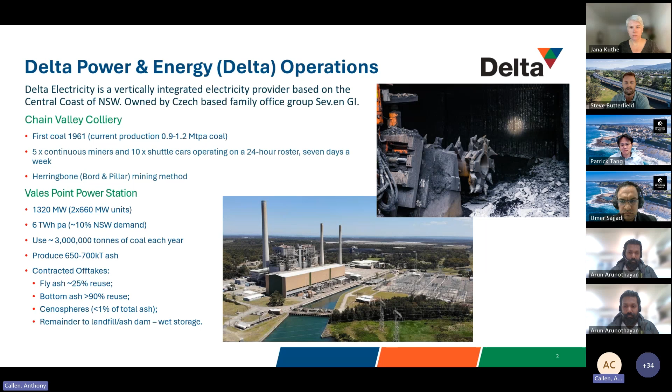This next slide sort of shows where we fit into the grand scheme of things. For those that don't know, when coal burns in a furnace, most of the organic material burns and produces the heat, which generates the steam, which gets turned into electricity. But the mineral matter that doesn't burn inside the furnace is termed coal ash, and as I mentioned before, we recycle about 25% of that, and then the remainder gets landfilled.

There. So you got me there, Aaron? Yeah, clear now, Anthony. Yep.

Gotcha. So the remainder of the material gets landfilled. And so we're constantly looking for new opportunities and new markets to reuse fly ash rather than landfill it as well.

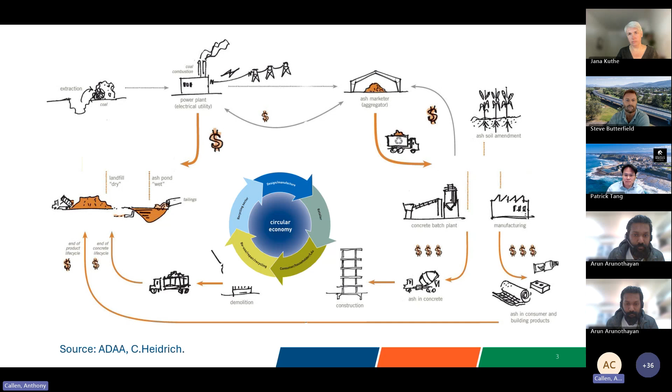So today's project is the SmartCrete project run through the University of Newcastle, and I'll let Patrick and his group talk a lot more about the technical side of things and where we got to with the project. But I'll just throw up a couple of other technologies that we've been supporting around the reuse of fly ash.

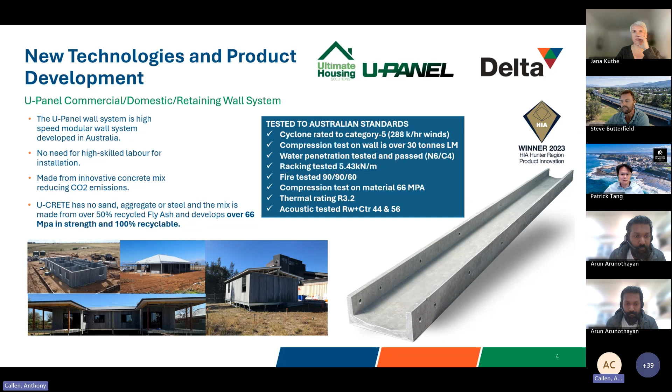So ash, of course, as we mentioned, can get used in all sorts of concrete products, which opens a wide range of materials, including precast materials. And we've been supporting a local group that produce a precast panel that can be used for housing construction. So the U-Panel Group, or Ultimate Housing, based at Somersby here on the Central Coast, have been using fly ash from Vales Point to generate these precast panels, and have been used in a number of housing projects, including some on-site offices we've built with them here at Vales Point, but also you can see there are a couple of other examples throughout the state.

Now, utilising fly ash in cement products is an important area to use a lot of fly ash, but there are sort of standards that require or limit some of the volume of ash that can be included.

We've also been working with another group on what they term a very low carbon concrete, which is actually a zero cement concrete that they've been working with. So this is an alkali activated cement where they're using high volumes of fly ash and slag from steel making, mixed with some other activators to produce a zero cement concrete, essentially.

The images on the right hand side there are some of the field trials that Patrick and Steve from Daracon will talk through in a little bit more detail. But I thought I'd just set the scene there with a couple of slides just to show where we fit into the scene.

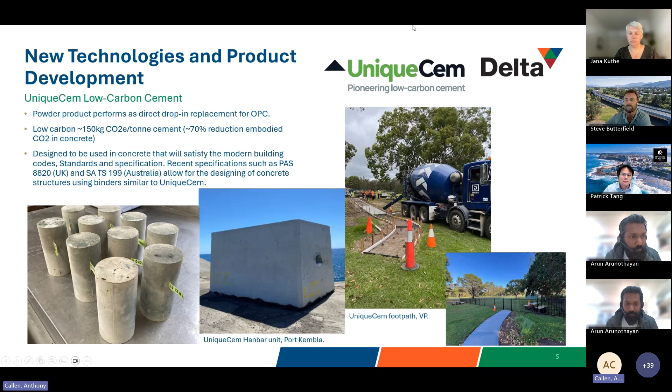And I guess the big driver for us for this research project with SmartCrete was looking at alternative technologies and new markets to reuse ash from coal-fired power stations. So, Arun, I might stop sharing there and hand over.

Yeah. Thank you so much, Anthony. That's a fantastic layout for us to build on. And it's great to see. I mean, I was told the other day that we produce about 12 million tonnes of ash annually, and most of it goes to dams, and trying to do something with it is a great idea.

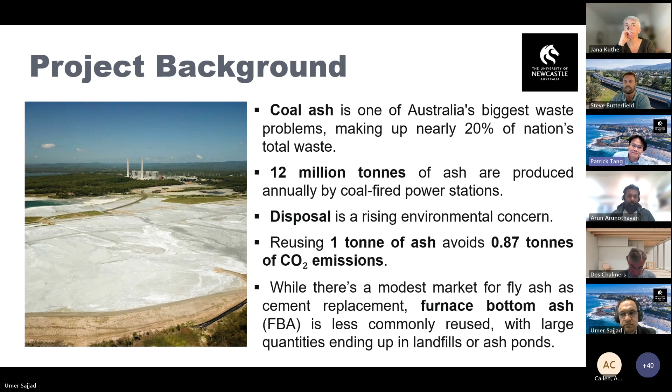So in this project, we focus on exploring innovative ways to use FBA in concrete. We try to reduce environmental impact and also support Australia's transition toward sustainable waste management practices. It's an industry-driven research project, and we try to develop practical, impactful solutions to solve the ash problem.

This project is funded by, and also supported by SmartCrete CRC and industry partners, including Delta Electricity, Daracon, Concrush, Ash Development Association of Australia, and Transport for New South Wales. This project also received support from researchers at RMIT. We are Newcastle University, and we are the lead of this project. That is the background of the project.

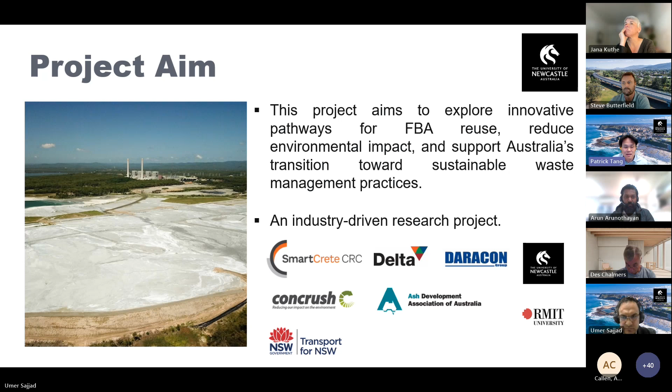Thank you, Professor. So today we will be talking specifically about furnace bottom ash. First of all, what is furnace bottom ash? From coal combustion electricity power generation, we have a lot of ash production, and one of those is furnace bottom ash.

The collection is such that a major portion of the furnace bottom ash sometimes ends up in ash ponds for reclamation, or sometimes a smaller quantity can be reused for different purposes, like embankment fills or fine aggregates. The production in Australia is around 10 to 20%, which is around 1.3 to 2.6 million tons annually.

Just talking about furnace bottom ash, in composition it's chemically similar to fly ash but with larger particles. So when we compare it with cement and other cementitious products, it's slightly coarser than those products. That's why we have to treat it by doing some pre-treatment, then we can use it as SCM or as other fine aggregates.

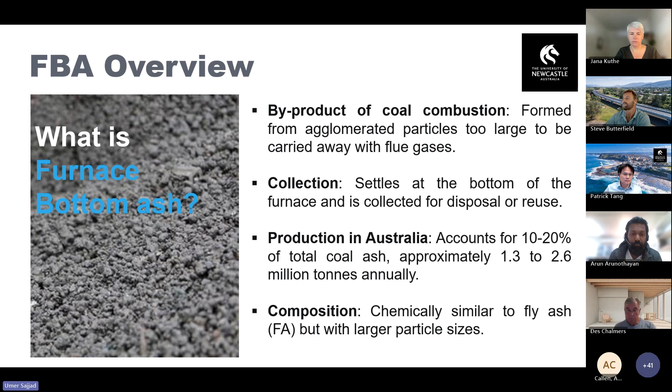So the benefits of reusing furnace bottom ash is, of course, environmental sustainability. When we use furnace bottom ash, we use it as a partial replacement of fine aggregates in concrete, and we are also developing and researching to use it as an SCM in concrete. So we can replace cement as well as replace natural sand.

When we are replacing natural sand, we are using fewer virgin resources, and we will promote circular economy initiatives by reclaiming furnace bottom ash from ash ponds, and then we can use it in concrete for long-term utilization.

Then, decarbonization and climate goals. Of course, when we are replacing cement, we are lowering the carbon dioxide emission from concrete production, and it will reduce the carbon footprint of construction materials and infrastructure projects.

It also has the benefit of aligning with the National Waste Policy Action Plan, which includes resource recovery options and reduction in waste generation. So if we are using furnace bottom ash in concrete and not landfilling it or making more ponds of it, we are reducing waste generation, and it is recycled content as well. These three major points are from the National Waste Policy Action Plan.

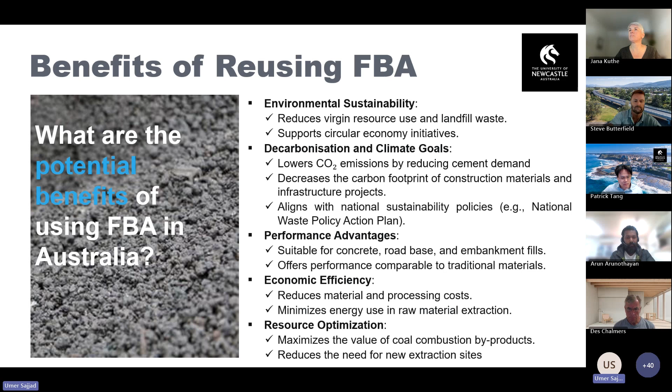So first we have published an article, a review article, published in a top-notch international journal. In this article, we have summarized the major portions about furnace bottom ash, focusing on characterization and the practical applications or different research backgrounds implemented to use furnace bottom ash in concrete or other applications.

This paper also focuses on the United Nations Sustainable Development Goals, specifically 9, 12, and 13. In this, we have summarized everything into a compressive strength chart, which you can see on your screen.

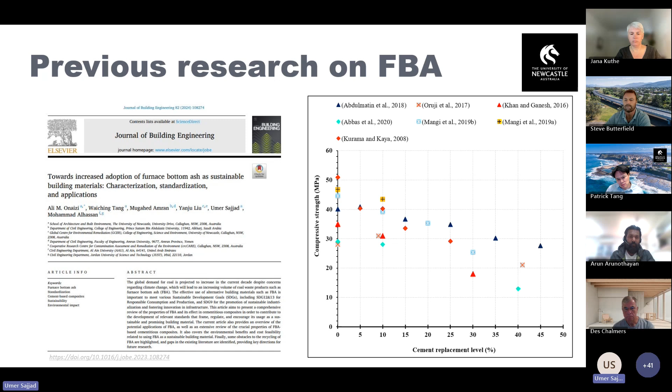Compressive strength is the major parameter used to determine the characteristics of concrete. In this slide, although the replacement level goes up to 45%, the strength is significantly reduced if we use furnace bottom ash as SCM or with fine aggregates, but up to a replacement of 5 to 10%, the strength is not much reduced compared to the control concrete.

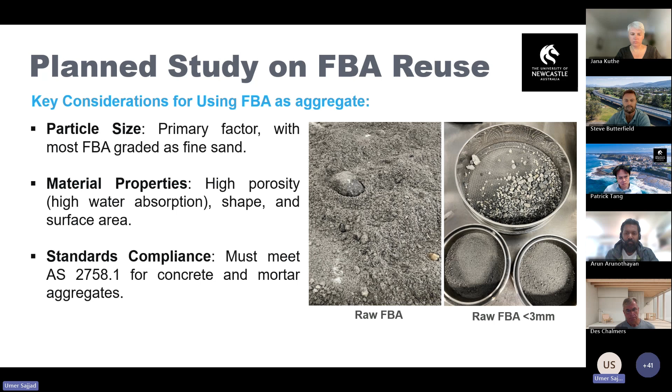So how are we using furnace bottom ash, and what are the major parameters? First is particle size - it is slightly coarser than fly ash and normal supplementary cementitious materials, which is why it's feasible to use as fine aggregate. It has high porosity, high water absorption, and the shape and surface area is slightly higher compared to natural sands. It meets the compliance of AS 2758.1, where we compared the characteristics of furnace bottom ash with aggregates used in concrete and mortar, and it lies within those ranges.

For FBA as an SCM, we have to treat it with different methods before we can use it. As said, it is slightly coarser and has low pozzolanic activity, so different methods have been adopted in research, like heat curing, grinding, activation agents, or blending with other SCMs. What we adopted is blending with other SCMs, because with heat curing you won't get much benefit, and you can't do heat curing at the site specifically for in situ production or usage of concrete - it's very difficult to apply.

The preferred method we opted for is co-grinding or blending with SCMs for lower cost and expertise. In our case, we used ground granulated blast furnace slag, and co-grinded the furnace bottom ash with it, then replaced cement with that blend. In addition, we replaced natural sand with furnace bottom ash, working to comply with Transport for New South Wales specifications, specifically R53 and R83.

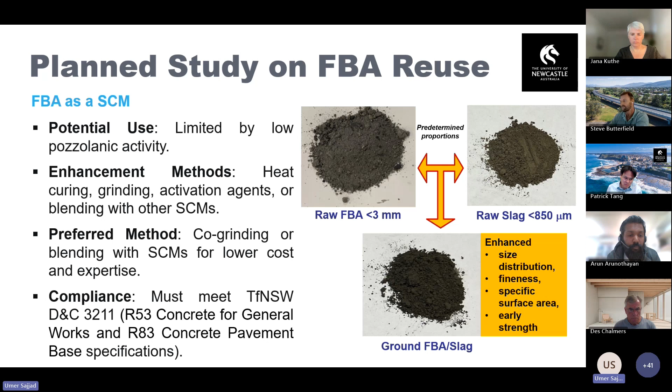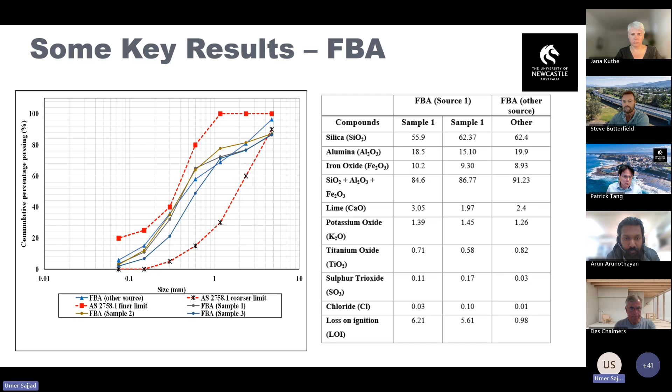This is the particle size distribution results of the furnace bottom ash obtained from a couple of sources, and from one source we've done a couple of analyses. We have chemical composition and also particle size distribution data. We can see that furnace bottom ash lies perfectly within the Australian standard limits of coarser and finer aggregates, so as per standards, we can easily use it as fine aggregate.

These are some key findings from our research done here at University of Newcastle. We have slump values - here I'm showing 5 mixes from the other major mixes we've done. The first is CR0, the control concrete without FBA or any other addition or replacement. CR25 is controlled concrete but with 25% of natural sand replaced with furnace bottom ash. The other 3 mixes are CGF10, CGF20, and CGF30, which are co-grinding of furnace bottom ash with slag, replacing 10%, 20%, or 30% cement with ground FBA. If you have any questions about the mix design, let me know.

So we have slump values first. The slump of the furnace bottom ash concrete mixes is slightly higher - but why? As the water absorption of furnace bottom ash is higher, we used an additional amount of superplasticizer to make it more workable. When we did trial or preliminary testing with a lower or similar amount of superplasticizer as control concrete, we got a harsh mix, very difficult to work with and place. So we found that if we increase the amount of superplasticizer and slightly increase the water in the concrete mix to account for the water absorption of furnace bottom ash, we can have a better mix that is workable and easily placed. That's why the initial slump of these FBA concrete mixes is slightly higher compared to control concrete.

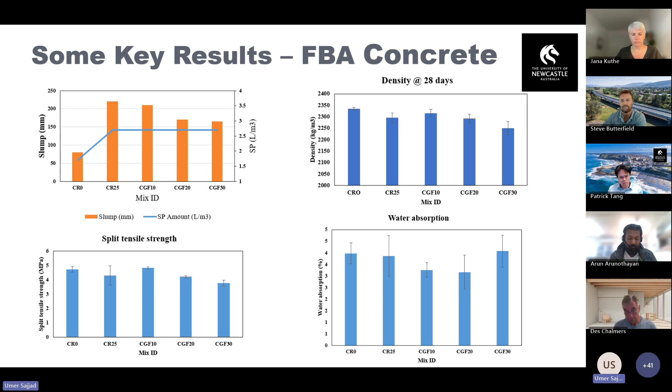Here we have summarized the compressive strength and other tests we conducted. For workability, we also did the slump retention test and air content test. For strength, we did flexural and modulus of elasticity tests. We also focused on durability tests, especially shrinkage, abrasion, and carbonation resistance, and chemical resistance against acid and alkaline solutions. We also did microstructure analysis and life cycle assessment, but due to time constraints, we are showing just the key or major findings.

Here I'm showing the results of compressive strength up to 90 days. We conducted the test, and you can see that the 10% replacement mixture produces promising results compared to the control concrete.

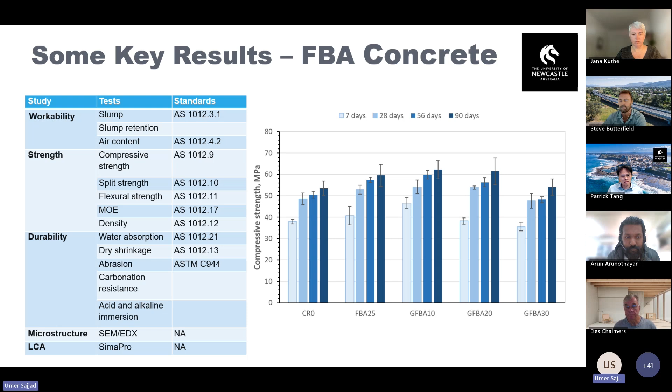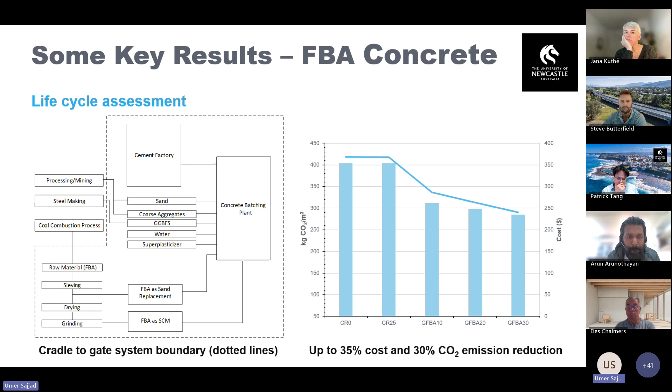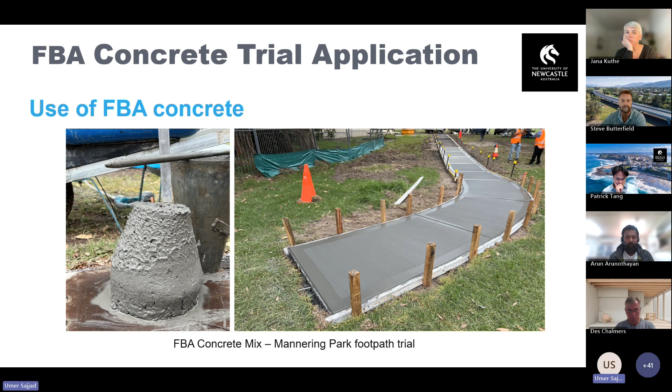These are some challenges and solutions for utilizing furnace bottom ash on a mass scale. We have some technical challenges, the major one being standardization of the furnace bottom ash. If obtaining furnace bottom ash from different sources, there might be slight changes in properties and chemical composition, and sometimes slight changes in physical properties as well, like in some cases coarser particles and in others slightly finer particles. Then there are regulatory and standard challenges, like in terms of handling and storing the furnace bottom ash.

As said, if utilizing furnace bottom ash as SCM, we have to grind it well beforehand to utilize it in concrete, so we have to consider the handling or storage of those ground furnace bottom ash. Then there are some economic challenges specifically related to the pre-treatment of furnace bottom ash to be utilized both as SCM and as fine aggregates. And then there are logistic challenges, because we have a few number of coal power stations around the state or country, so transporting furnace bottom ash to desired locations has some limitations, and sometimes we have supply chain issues.

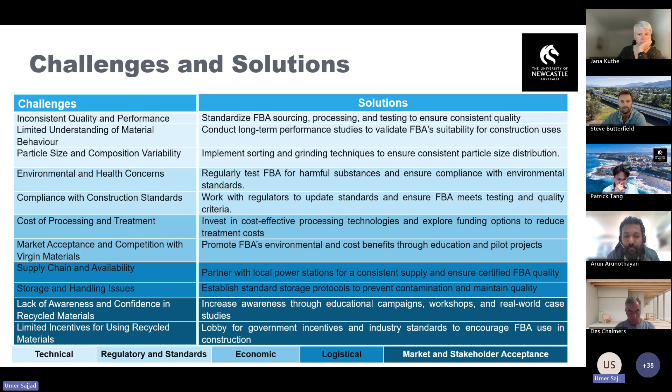For an overall view of the project with the SmartCrete and other industrial partners, we are aiming to continue until the end of the project. Currently, we are developing guidelines so that the public can use, utilize, or get an overview of the use of furnace bottom ash in concrete and the construction industry. Thank you, that's all from my side.

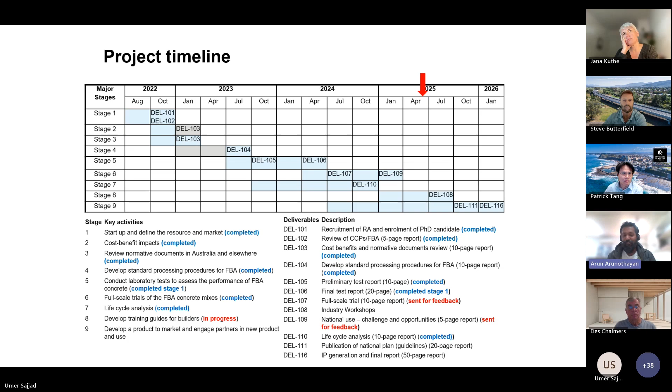Thank you, Patrick and Umer, a great presentation. I think one common misconception in our industry is that as soon as a material is sustainable, it's going to be super costly and not cheap. But this initial research shows it's not only sustainable, it's also 30 to 35% cheaper, which is a great thing to look at.

Another challenge is to scale up and produce on a large scale, and that's where we go with our fourth speaker. But before I introduce him, if anyone has a burning question, feel free to pop it in the chat, and we will take questions after the presentation.

So the last speaker, Steve Butterfield from Daracon. Steve has over 30 years of experience in the construction industry, working both with large and small contractors. He has held various concrete, quarry, and project roles in concrete production, major projects, and technical management. He has had a long involvement with Daracon Group and others, including RFK Engineering Services and BHP. He spent 10 years involved in the BHP Jansen Canada twin shafts project in weather conditions ranging from -40 to 40 degrees.

And the Woodsmith project for twin shaft construction in Whitby, UK, both specializing in super workable concrete, this is SWC concrete. Current projects he is also involved in include BHP Prominent Hill, South Australia, a 1.3 kilometer ventilation shaft project, and K92 gold mine construction project in Papua New Guinea. So he's been around the world, and it's great to have you here, Steve. So, over to you.

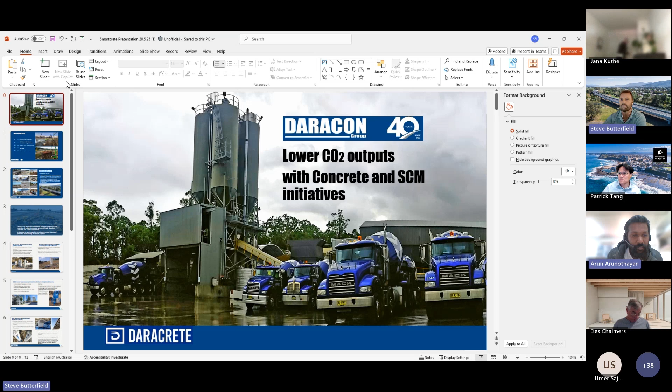Thanks, Arun. You hear that? Yeah, clear. I'm sharing my screen here. Is that sharing? It's the other slide, Steve. Maybe go to slideshow and start from the beginning. The slideshow is a few tabs on the right. Okay, how's that? Yeah, that might work.

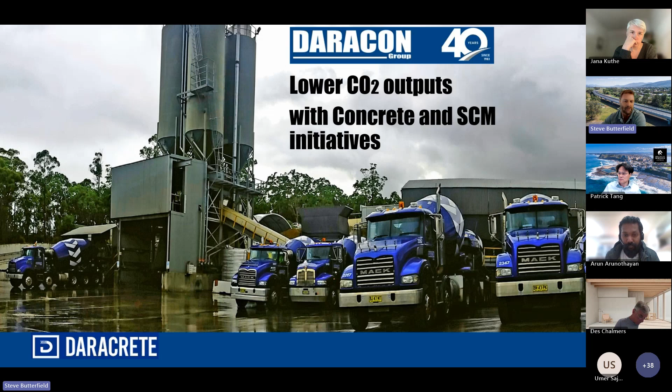Okay, thanks for that introduction, Arun. I'm just coming at this from a point of view from Daracon. Just before we start, I'd like to run through a little bit about the Daracon Group and also talk about some of the other work they're currently doing with their fly ash business.

The Daracon Group was established in 1983 and is one of the largest family-owned construction businesses in New South Wales, with over 850 employees. The Daracon Group is a collective of businesses, as you can see on the left, pretty substantial, committed to delivering superior civil construction services across both public and private sectors with over 4 decades of experience. So they have civil engineering, concrete, quarries, plant hire, infrastructure, all the way down to polywelding and landscaping.

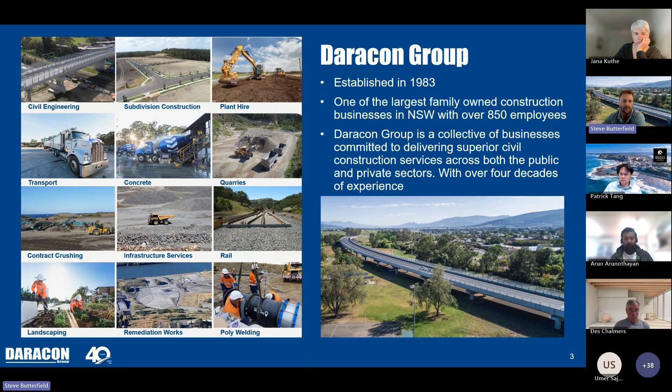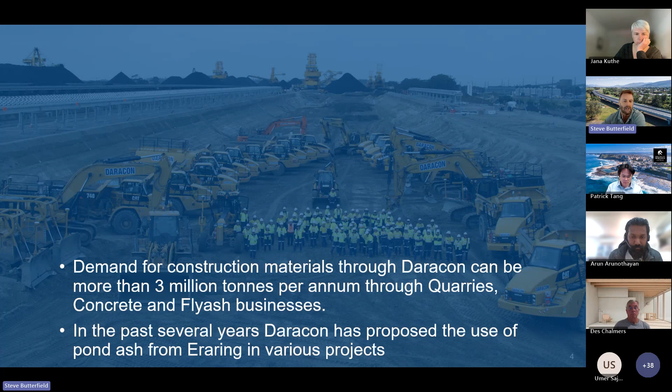Demand for construction materials through Daracon can be more than 3 million tonnes per annum through quarries, concrete, and fly ash businesses. In the past several years, Daracon has proposed the use of pond ash from Eraring in various projects, and they have spent a lot of time on research and development with that.

Part of their business is obviously bulk fly ash with Daracon. They do underground grouting and mine backfill. For the past 5 years alone, they've averaged the reuse of approximately 200,000 tonnes per annum of ash.

Residential and commercial developments in Newcastle forecast a long future of this type of work. Two recent projects have seen a projected use of approximately 250,000 tonnes of material in the coming year alone.

They're also working on heavily bound material, modified road base materials, investigating potential use of pond ash and small volumes of cement for setting currently. Initial trials were undertaken late last year with various viable sources of materials, including different sources of ash and locally available fluids to gain optimal mixes across different strength characteristics. This includes select, modified, lightly bound, and heavily bound material.

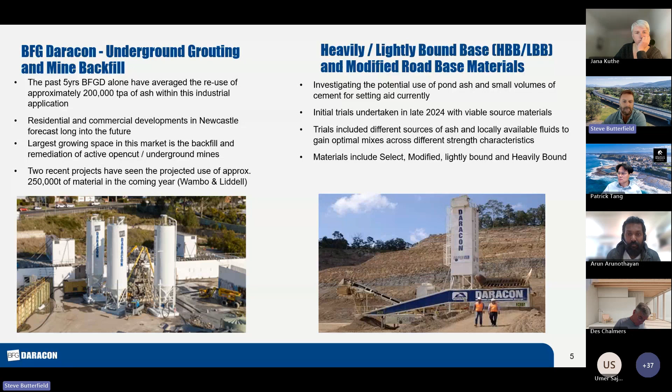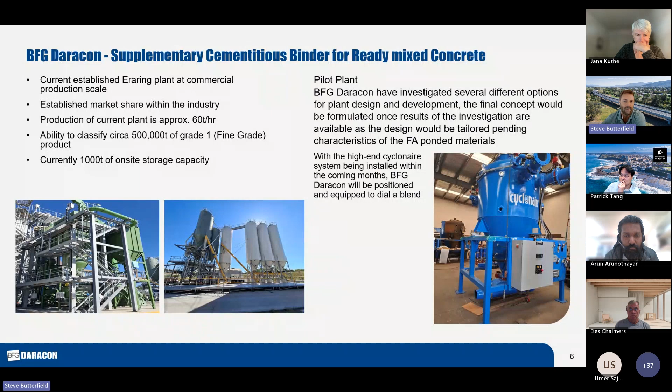BFG Group also had initial trials for bulk grout undertaken in late 2024 with various source materials. They've had successful test results in a variation of strength parameters up to 60 MPa, with success up to 100% cement replacement mixes being designed. The target markets would be within the residential, commercial, and civil sectors.

The Daracon business, the concrete branch of Daracon, currently has a range of 50% plus high-range fly ash concrete mixes, which we've used successfully previously, as well as supplying the bulk fly ash grout CLSM, 90% fly ash and high-strength grout for mine fill and mine subsidence.

We also specialise in a lot of super workable and high workable concrete. We've got developments of near 70% SCM blended concrete mixing, and we're looking to utilise the waste concrete aggregates with the Daracon Buttai recycling facility, which is shortly to come online. So there'll be a lot of work involved in that.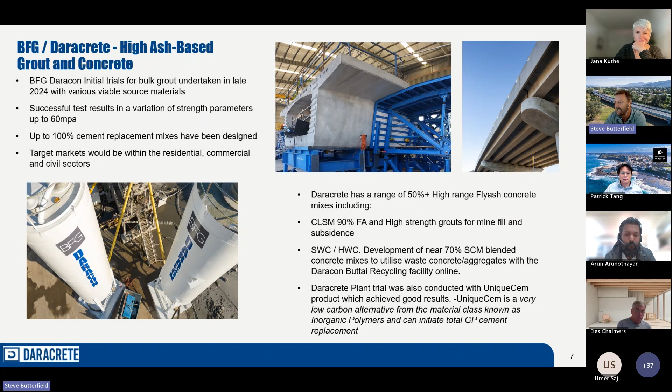The Daracon plant has also conducted trials with UniqueCem, as Anthony discussed, and it's achieved pretty good results. It's a low carbon alternative from the material class known as inorganic polymers, and it can initiate total GP cement replacement also.

Daracon have also, apart from some Smart Creek trials, done work just within the group, looking at what we can do and what mixes we can come up with. These ones were done approximately 22 months ago, and the first four trials were basically just a control 25 MPa.

This was done in conjunction with the construction arm of Daracon. So we had the concrete, set out an area with Daracon provided for us, and set up three test slabs, which you'll see shortly. The first mix is basically just a regular tri-blend, which most guys here in the technical would be familiar with - a tri-blend of fly ash, cement and slag.

The second one had a recycled coarse aggregate added to that same tri-blend. The third one incorporated the same tri-blend of slag, cement and fly ash with recycled concrete, but also had 100% fine sand replacement with furnace bottom ash as a fine aggregate.

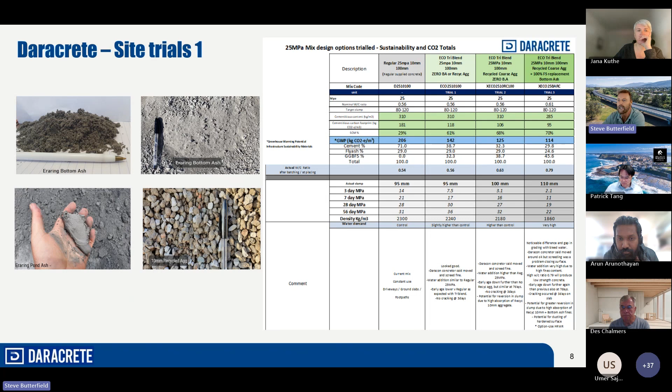You can see the area there - we've got the eco mix, the second one with the recycled aggregate, and the third one is the trifecta of the tri-blend with furnace bottom ash as sand replacement plus recycled aggregate. You can see on the right hand side trial 3 had some substantial cracking early on, which was predicted - that was a really hot day, and we provided no curing for that at all.

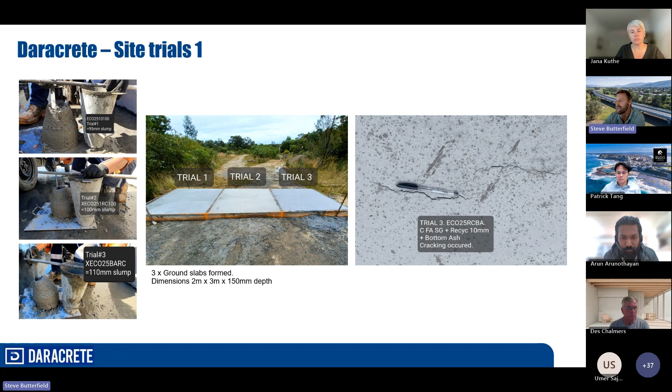We're trying to simulate what the residential market is, which I think most guys listening will know is pretty rubbish when it comes to curing. So we just wanted to try and match that and see what happened. Obviously, with that amount of slag and that amount of fines in there, water demand was really high.

The second lot of site trials was done in conjunction with Lake Macquarie City Council - this is a pathway at Macquarie Field. We didn't provide a control mix there; the control mix you can see on that chart is just for reference.

So we only provided a tri-blend eco blend on this, which was basically a 50-50 cement slag blend, using a recycled aggregate and some of the furnace bottom ash fine aggregate as well. That went particularly well - the path is still looking really good to this day.

Obviously, with slag mixes, when you add the recycled aggregate, it has a very high water demand. You can see the results on the right compared with the control - only 3 MPa at 3 days compared to 13 with regular concrete. And as we know, the growth is obviously a lot better in slag concrete than regular concrete, so at 28 days it more than passed.

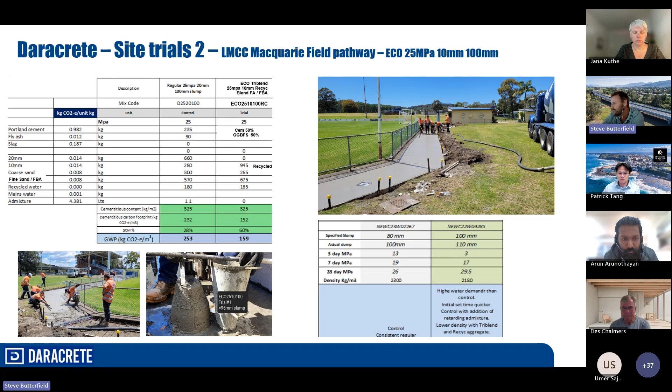Site trials 3 are the ones that have been discussed here, usually the Vales Point material. Again here we had the control mix, which is basically a standard 25 MPa 100 slump, in one part of the footpath.

The other part of the footpath had the tri-blend of GP, slag, and ground furnace bottom ash as a cement replacement, and we also had the furnace bottom ash as a sand replacement in that mix. As per the presentation, the product worked particularly well, considering that was a 45-minute delivery time as well. So load 2 obviously lost a bit of slump, so has a larger water demand - there's also a bit of a colour difference.

But as of the next day, when I went down there was no initial cracking, which is a really good sign.

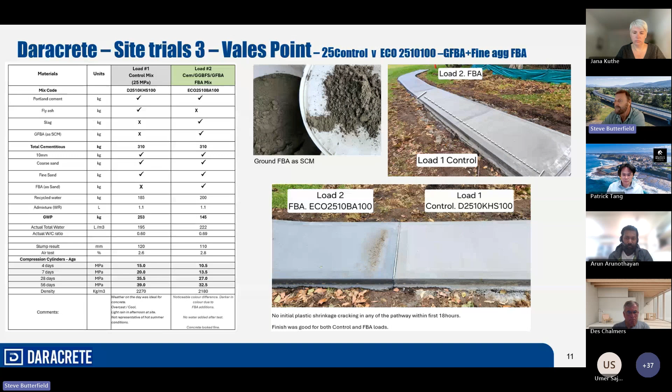However, the production using these materials needs a high level of quality control and good site practices. The delivery and storage of the ground furnace bottom ash and the furnace bottom ash as a fine aggregate, the batch plants requires further progression for bulk deliveries in future if the market uptake is large. Obviously, the storage of the furnace bottom ash as a fine aggregate, it's hard to go through bins and tends to want to jam in bins, so the conditioning of that would be an issue.

And that goes equally as well as anyone who's worked with recycled aggregates knows how important it is that those things are absolutely soaked in water. They just have such a large absorption, and any concrete leaving batch plants will come back by half in slump if it's got any sort of delivery distance.

The performance specifications rather than prescription - now this is the big one. It has to be promoted by specifiers and designers. Concrete suppliers shouldn't do all the heavy lifting on this.

I think there is a conversation going on in chat, so I'll quickly read it for everyone's benefit. Jared asked, does the ground bottom ash comply with AS 3582.4? To which Patrick answered, the short answer is yes. The ground FBA complies with 3582.4. In fact, we compare its performance against AS 3582.1 for fly ash, which is more stringent than 0.4.

And of course, Jared pointed out LOI is quite high, loss on ignition. Does this impact admixture interaction, air entrainers, and so on? To which Patrick answered, we haven't studied the interactions with air entrainers yet. Could be a focus for future research. Jared, do you want to expand on it more?

We find with fly ash with a high LOI, it's hard to entrain air. Yeah, I think my thinking here is we don't use much air entrainers because we don't have freeze thaw here, do we? Except not so much in New Zealand either, but it's useful for workability and it adds a better finish under the trowel.